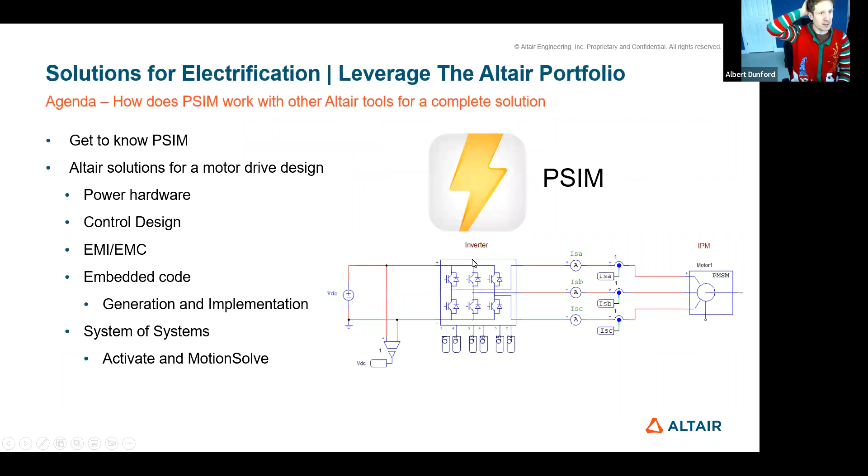It looks to me like there's a lot of automotive people in the session today, so this is right up their alley. Okay, so we'll slip by this one about PSIM. PSIM was first developed about 27 years ago. It was specifically developed for the simulation of power electronics, and you can see it positioned here between what we would call the system simulators, so Simulink, Activate, maybe ANSYS Twin Builder, and then the device level simulators like SPICE. So PSIM occupies this nice little zone in between the two of them.

You can do control level simulations with PSIM. You can do device level simulations with PSIM. Obviously, there's stuff that SPICE does well, which is the selection of circuit models and IC models, and clearly Simulink and Activate have functionality beyond what PSIM provides. I think of image processing toolboxes and things like that, which is just not power converter related. So why does PSIM exist? It's widely regarded for simulation speed, robustness of results, and dependable convergence.

Okay, the PSIM advantage. PSIM was originally developed in the 90s, because power converters and power electronics were becoming more prevalent and more commercially or industrially relevant as more switching devices were becoming available. The tools used at the time to simulate power converters were SPICE-based tools and things like Simulink, which were not specifically made for the simulation of power electronics.

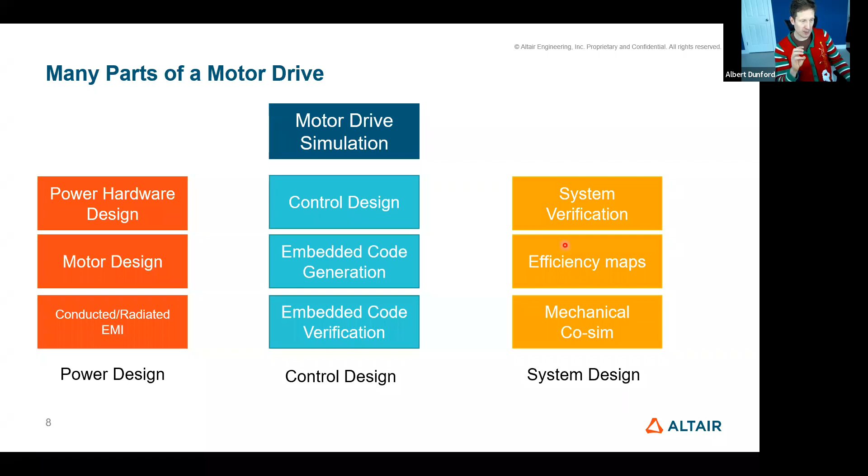Okay, so I want to spend a little bit of time talking about motor drives. We'll talk about power supplies a little bit later on, but based on some of the stuff that has recently gone on with development, linking to Flux and things of that nature, the motor drive part shows some really interesting things to discuss.

This slide is specific to motor drives right now, but a lot of what is here can also be moved over to regular power converters, be it a consumer grade converter or a grid-link PV application. The only thing that really would be crossed is the MotionSolve for the mechanical load or the Flux motor for the motor aspect. But this also gives you a look at where things are going with simulation, with PSIM as it integrates into the existing Altair tools, which are all mentioned here.

So focusing on a motor drive, I'll show you some interesting things with MotionSolve in a second. So this is a multibody dynamics tool. So we can include a simulation of the motor drive combined with the multibody dynamics. Flux and Flux motor are tools from Altair for FEA of motors for low frequency electromagnetics. We're going to see what can be learned when we include a Flux or Flux motor model into a motor drive simulation.

And then FEKO is a high frequency electromagnetics tool. The fun thing about PSIM is that because we've been set up to deal with derivative robustness in the power converters, we also are able to deal with high frequency interactions in distributed cable models that can typically cause issues, especially if you use a state-space matrix approach, which can lead to stiff matrix equations.

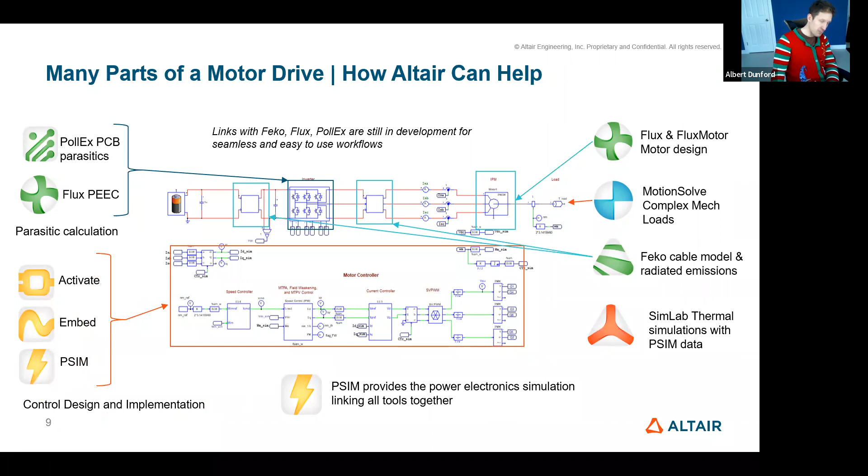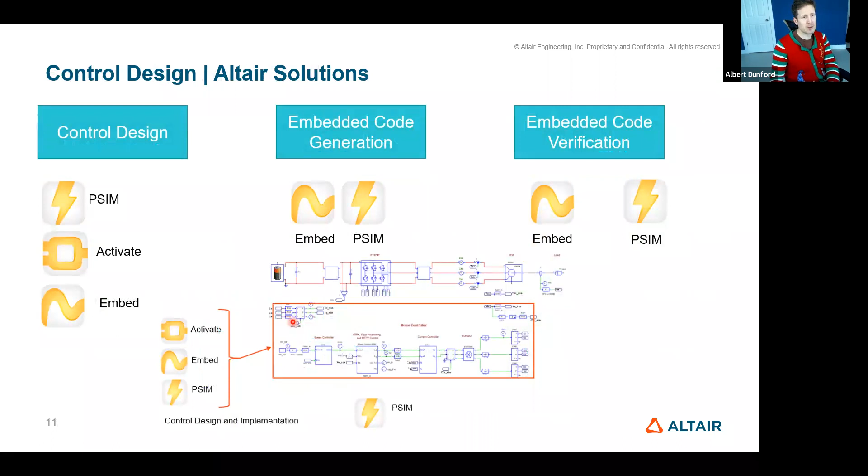There's the control side as well: Activate, Embed, and PSIM all can do control simulations. PSIM and Embed both have code generation workflows, and there's some things there to talk about too. Moving along here. Okay, so power hardware. These are all the things that deal with power hardware. I don't want to spend too much time on these. These are all kind of control design related tools. And then here's some system level simulation tools.

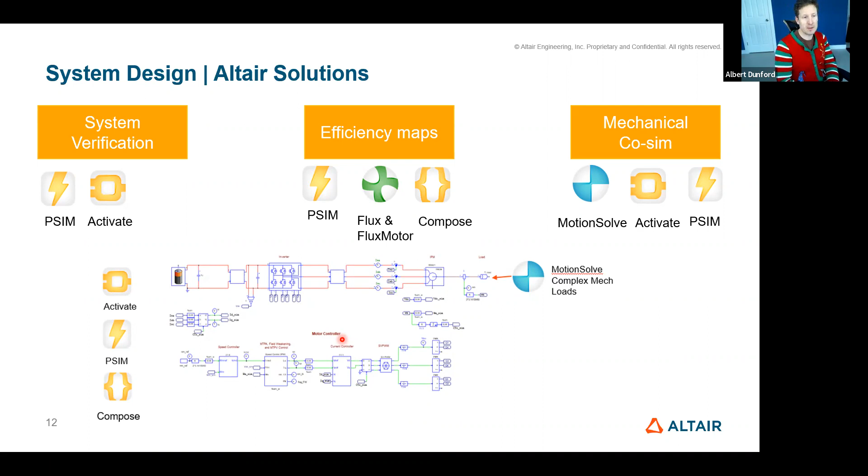So again, as PSIM matures inside of the Altair world, you'll see more and more links with other tools. Other tools to come will be things like HyperStudy, AI-based tools to help direct simulations to learn things in an automated way, with greater scripting and all that kind of fun stuff. So there's lots of other things to come. These are the things that we've been dealing with just recently. So a main strength of PSIM is simulation complexity.

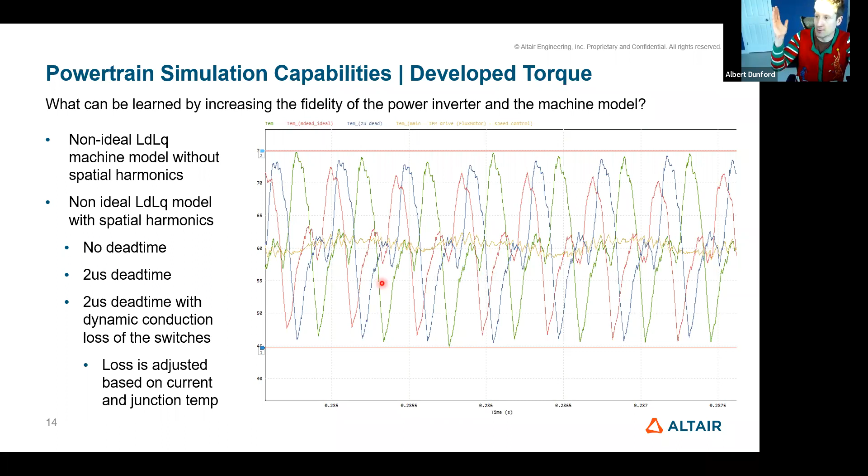And so here's another really fun simulation. This deals with motion multibody dynamics. So in this particular simulation, we have a motorcycle. And the drive for this motorcycle is a PSIM motor drive simulation, okay? And what we can look at here is, it's one thing to run a motor drive with a constant torque load. It's another thing, and I just want to get through a couple slides and we'll pull up some simulations to kind of look at this in a bit more detail.

It's one thing to do a motor drive simulation where we have ideal motor with no spatial harmonics and no LdLq changes. When we add spatial harmonics and we add a changing LdLq, that changes the control response of the motor. It makes the controllers work harder, introduces more noise into it. So what we can see here is that we originally had an aggressive motor control, which was stable with an ideal machine, and even was stable in a constant acceleration use case.

But what we can do here is we can see what happens when we add in now a multi-body dynamics of the system. So what we're seeing as this kind of plays over and over again is the top one is we've tuned the motor. So the bottom one was the original, which was an aggressive control loops for ID and IQ. And we can see,

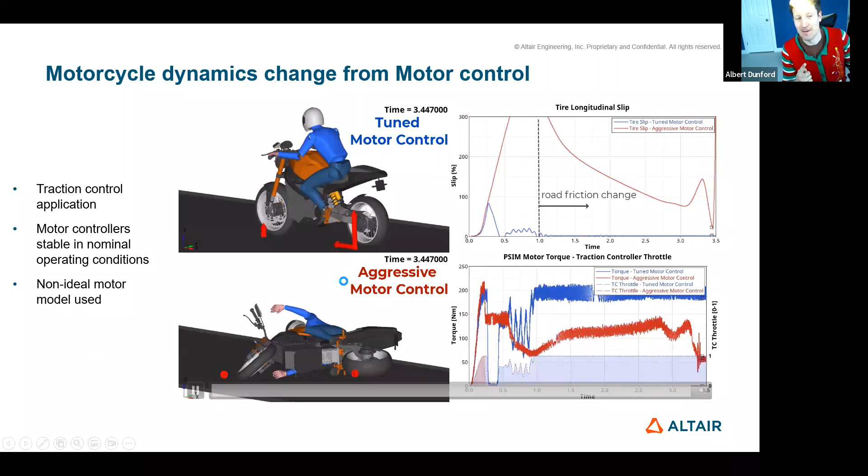Oh geez. Drew, it's just my PowerPoint that's frozen, right? I haven't frozen, just to be sure. Okay, no problem. Am I frozen or is it just the PowerPoint? It's just the PowerPoint. Okay. Close. I'll replay that video. Thank you, Microsoft PowerPoint, for your contribution today. We'll come back to that.

We were here. Okay, so you can see here, the bottom, this is developed torque, and this is the throttle command down here, and this is the tire slip of the two systems. So the red one is the aggressive controller, which was looking okay during acceleration, but then what happened is that the friction coefficient changes and caused the traction control to kick in.

And so you can see with the less aggressive motor control algorithm, this is for the current loops, for ID and IQ, it was able to handle the changing traction requirements. And you can see how that changed with the tire slip. And as we see here, the top one was able to maintain traction and still recover, where the bottom one went out of whack and caused our dear little friend to crash.

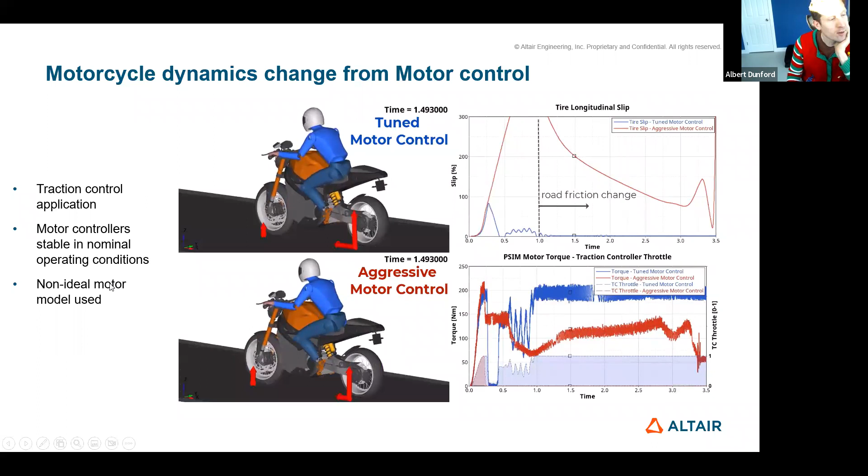So this is a full motion multibody dynamic simulation that we did using that. And again, it looked okay with an ideal motor model, but when we went to the non-ideal model, it really started to show issues. So here's a little look at that. So we did an ideal machine, and then we did the same controller with the non-ideal Flux co-sim, which had the spatial harmonics and the non-ideal LD LQ, and we can see the instability in the control response, right?

It still got up to steady state speed and it still recovered, but we can see that there's oscillation there in the ID and IQ values, which was causing oscillations in LD and causing oscillations in the developed torque. So it was marginally stable, but it still got up to set point speed. And we can see that none of that drama was present in the ideal motor model.

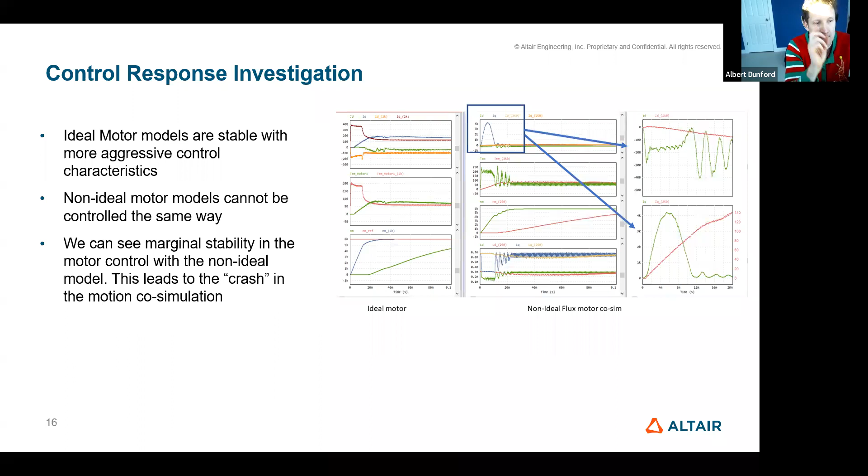So in this case, there's two control scenarios. We're switching at 20 kilohertz. Then the inner current loop had a 2 kilohertz bandwidth and then a 200 hertz bandwidth. So we did a 10x reduction there. And we did the ideal and the non-ideal. And you can see right away that the non-ideal motor model really behaved a lot differently with that more aggressive controller.

And here's another slide looking at how we can use these co-simulations to look a little bit more here. This is again with the motor model from Flux, which gives us copper, core, eddy, and hysteresis losses. We also are using a thermal model here where we can change between space vector PWM and DPWM and look at how the losses change on the device itself.

So we can see the developed torque is roughly comparable. On average, it is the same. Our total losses from the inverter were reduced by about 300 watts, and that's mostly in the switching losses. Then we see the copper losses, the core losses, and eddy losses are different. So copper loss reduced by about 90 watts, and the hysteresis losses went up by about 10 watts with DPWM. So DPWM saved us about 380 watts at this operating point. And we've modeled loss, conduction loss, and dead time with IGBTs here.

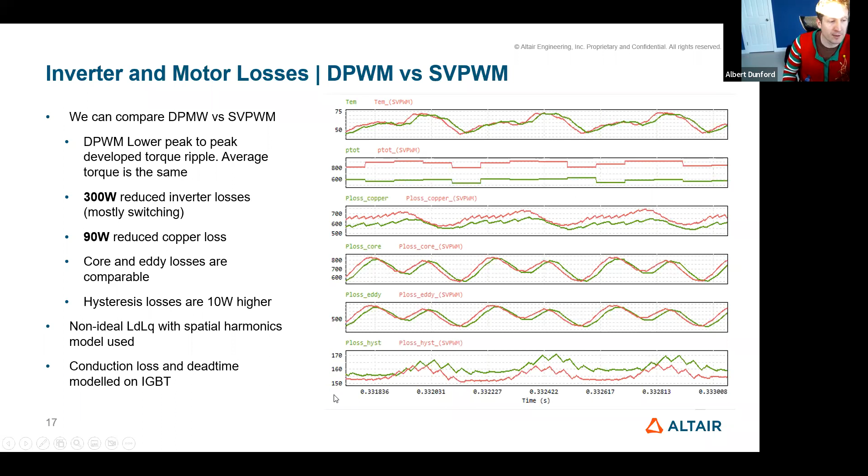So what's my next slide? Yeah, so let's scoot out of here and let's look at a couple simulations. Are there any questions while I'm heading over to simulations? Okay, perfect.

If you're not familiar with our design suite, this is it. So this is the motor control design suite, and what it allows us to do is to have a motor drive simulation and then tune it to our operating scenario. So DC bus voltage, switching speed, a constant torque load here, some basic motor parameters, and the motor control parameters here too.

So we can basically click update parameter file, and it gives us some controllers. It gives us a speed torque curve. So this is our operating envelope, what's possible based on our DC bus voltage.

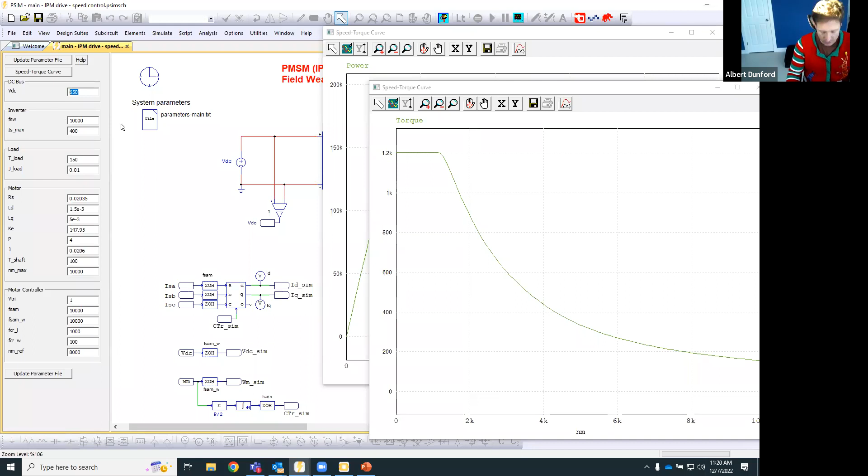So if I come in here and say this was a battery pack and we were at low state of charge, so say 400 volts, we can generate a new speed torque curve. There's the power curve, torque curve. So there's the new torque curve versus the old torque curve. And we can see, say, 8,000 RPM, 200 Newton meters versus now 150. At 4,000, we're just above 200, whereas here we were above 400 Newton meters.

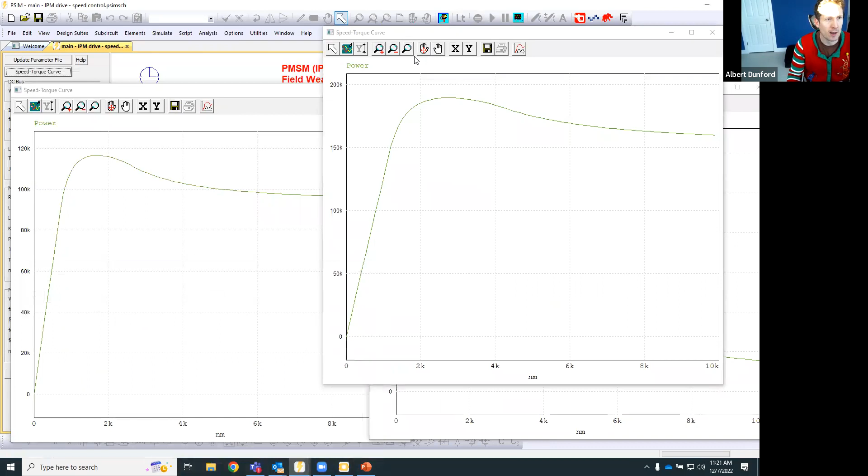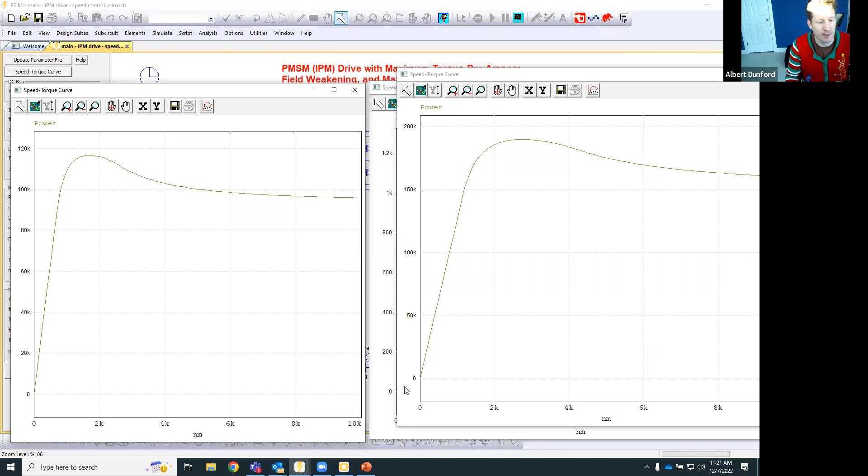And then the max torque region is about halved as well. You can really see it in the power profiles. So these are peaking out around 120 kilowatts versus 200 kilowatts, and 150 versus just under 100 kilowatts steady state. So these are some interesting. So this is one thing you can do with it.

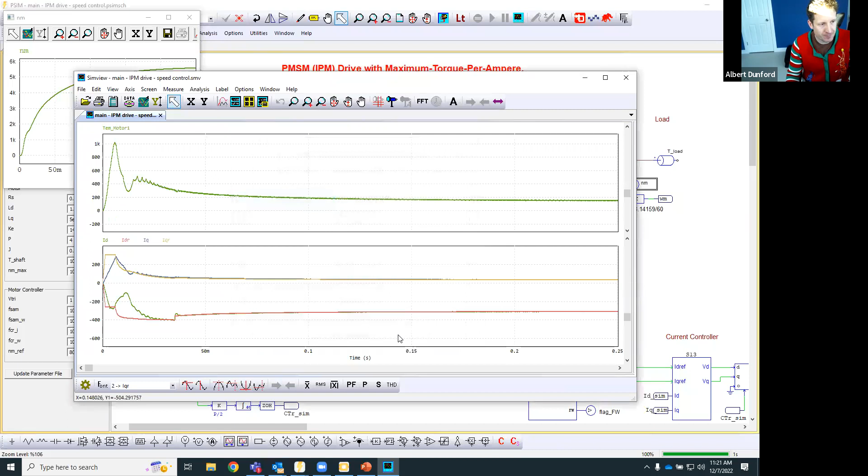And the other thing you can do with it, again, you can generate these control loops. So this was with an ideal model. And again, we can run the simulation and we can see the shaft speed. We can see the developed torque. Here's the developed torque of the machine. And again, it's the control values here, ID and IQ. So we can see what this looks like. So this all looks pretty good.

And one of the things you could do would be then to take this away and then link this to MotionSolve to do that multi-body dynamics that we looked at a bit earlier, right? So what has happened is we've now got the ability to do the Flux Motor lookup. We've also got the ability to do the Flux itself lookup.

So Altair has two tools. There's a tool called Flux Motor, which is basically for designing more common motors in more of a template kind of way, versus Flux, which is a full 2D or 3D solve of your motor itself. And so how we're doing this right now is it's based on lookup tables. So the lookup tables are generated by Flux, and they include a lot of information.

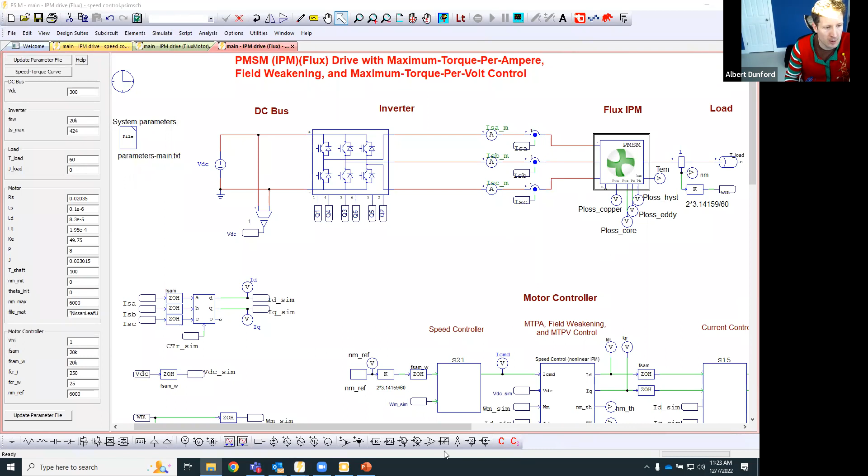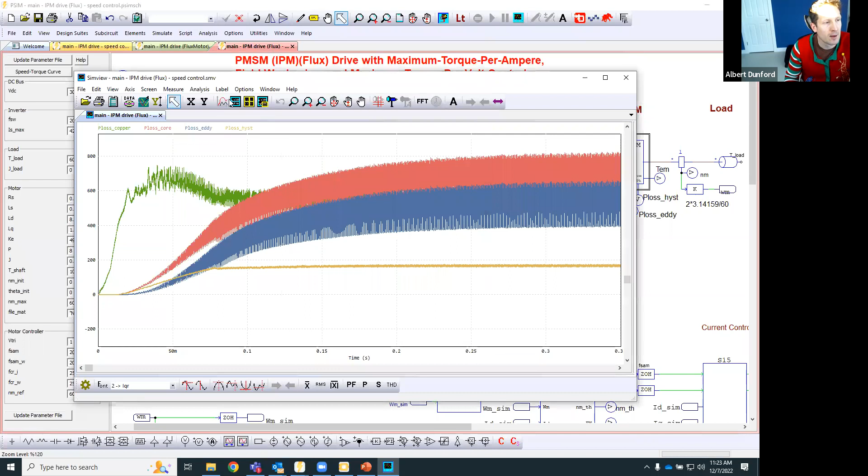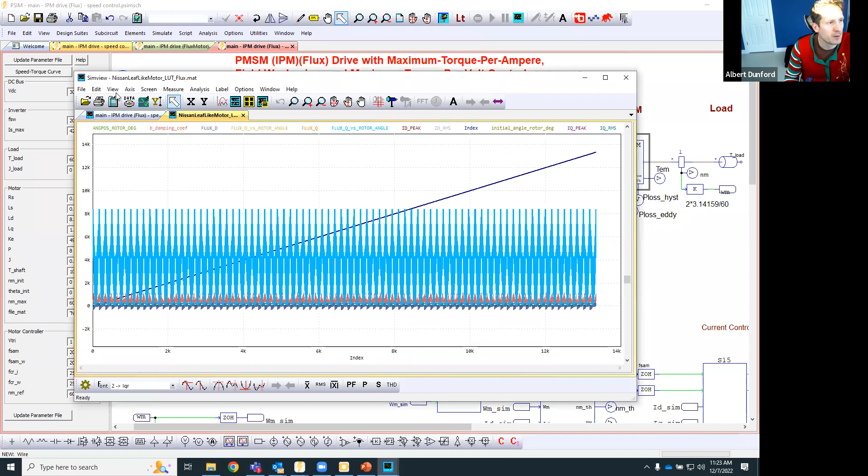So we can pull up what the information looks like here. Okay, so these are some losses. Let me pull up Flux. Here's the lookup table. Let me show you the data set that's being used here. Okay, so we've got rotor position, we've got D and Q flux, we've got iron losses, we've got a core, we've got hysteresis, all that kind of information there.

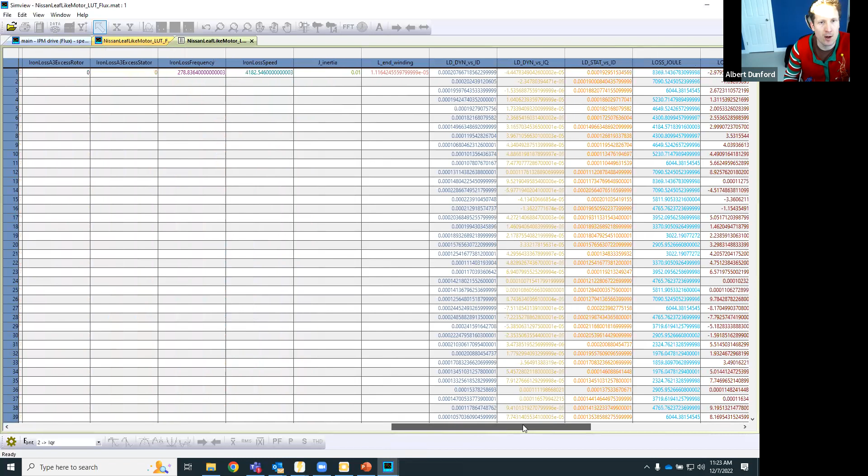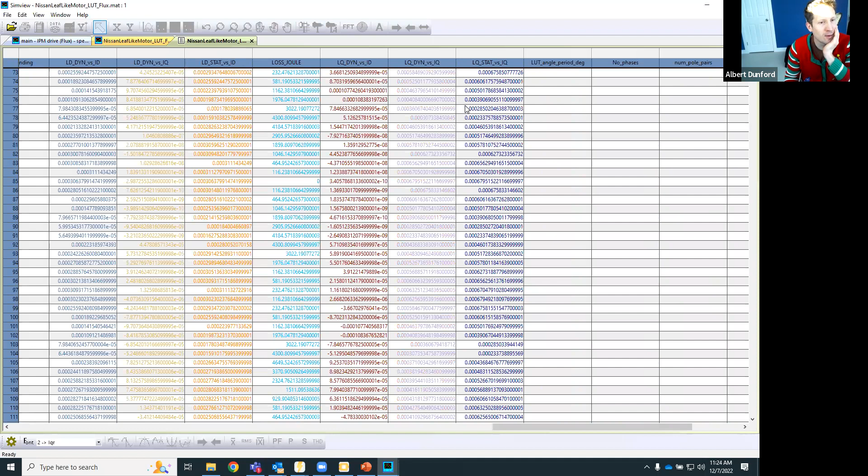LD and LQ as dynamic and static lookup tables. So it's really a fairly comprehensive listing of lookup values and information here. So this is the motor model, and again, it's a lookup table. But from there, we can look at this kind of information. So here's the losses from that machine. Here's what LD and LQ look like. The developed torque.

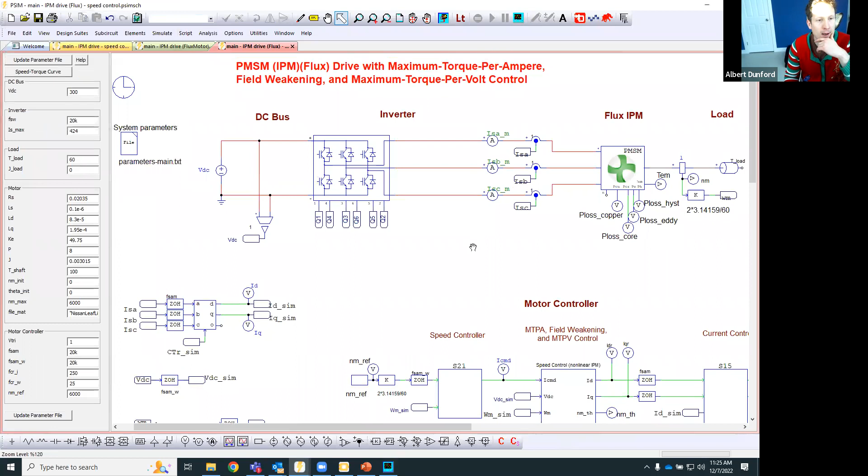Is there, and we're able to zoom in and see just what exactly is going on. So here's what the LD and LQ values are. Here's the developed torque of the machine. And again, this is an ideal switch. So going from here is relatively straightforward. We can come in here, we can switch this to a thermal model. So this models our switching and conduction losses and gives us a first pass at our heatsink. We can also change up the DC bus, put in caps, all that kind of fun stuff.

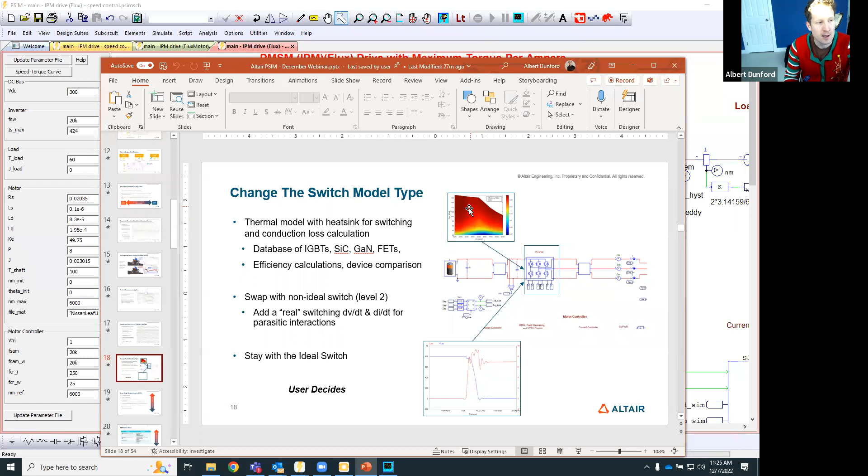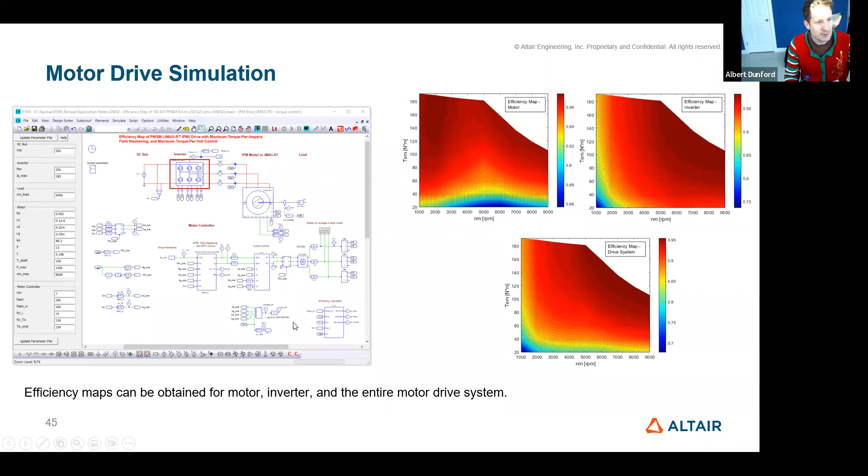And you can generate these plots for different junction temperatures and, if you're running off a battery, different battery states of charge. So you can do a nice drive cycle evaluation or that sort of thing. So these are some nice things that can work from there. So again, that's going to be released next week. So coming away from the Flux models, we'll come back to some simulations. I just want to make sure I get through content here.

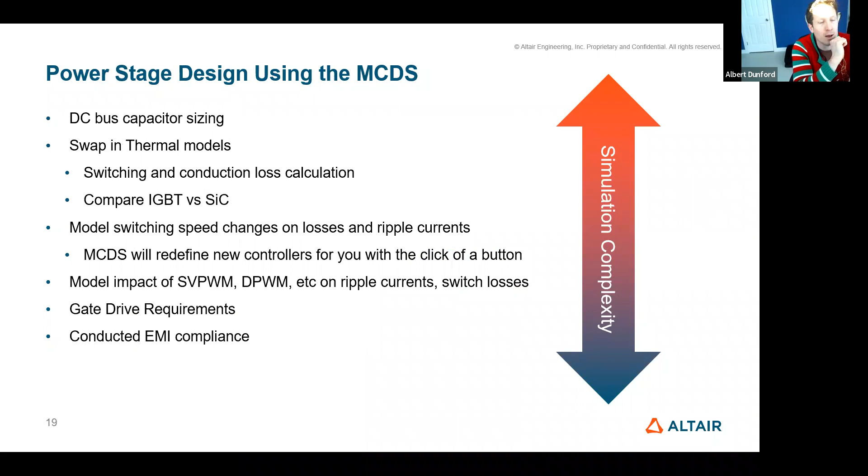Again, it comes back to your decision about what kind of model you're going to use, be it an ideal switch or the ideal machines or whichever you're going to use. And so it's really about simulation complexity being your choice. So this kind of covers the ideal switch, the thermal switch. So we've looked at the ideal switch. I haven't shown you a simulation yet with a thermal switch. We'll look at what the level 1 and level 2 switches can show us in a moment here.

That bridges me to conducted EMI. What we're trying to do on the EMI front is show what can be learned in simulation versus discovery in chamber. We're not going to ever claim to be able to replicate 100% what the hardware will tell you.

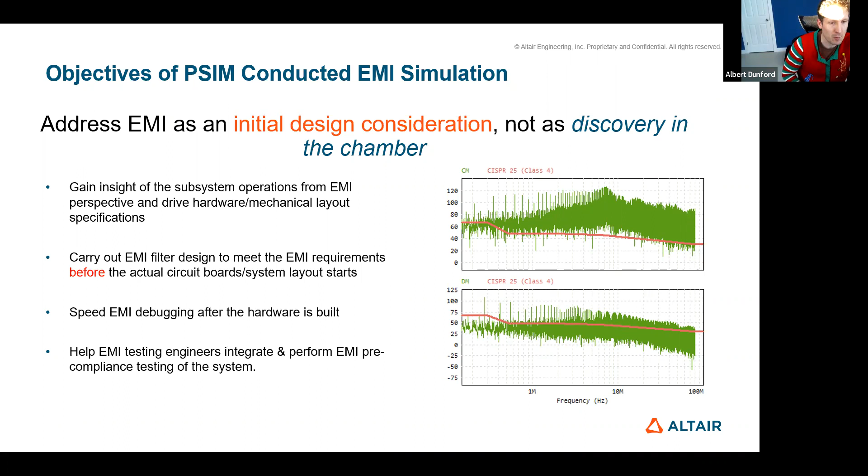What we do want to be able to do is to give you actionable design decisions, so you can learn these things in simulation before you either pay for testing or build prototypes, or you can look at sensitivity to certain things. So it's these things that we want you to be able to understand. So again, looking at how we can best mitigate our EMI issues, or filtering and things of that nature.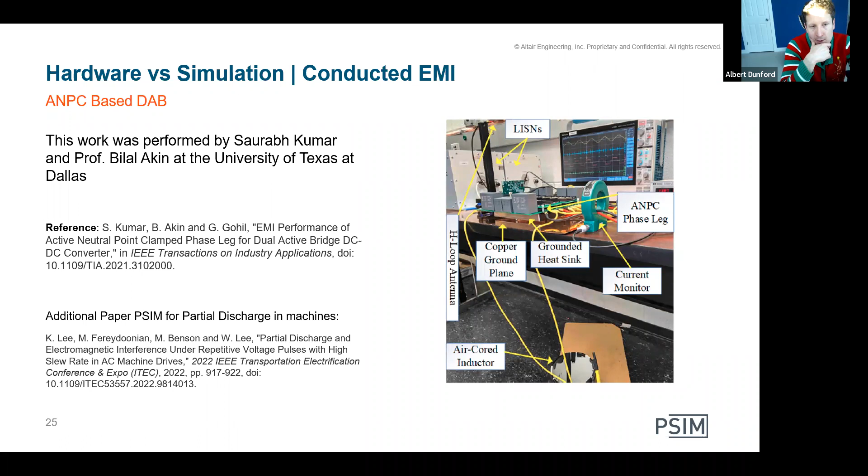Okay, so there was some work done at UT Dallas. They looked at a dual active bridge converter to look at conducted EMI, and we're going to be looking at the common mode current here. So this is the setup: basically the dual active bridge with silicon carbide devices on the primary and secondary. These were the parasitics associated with it.

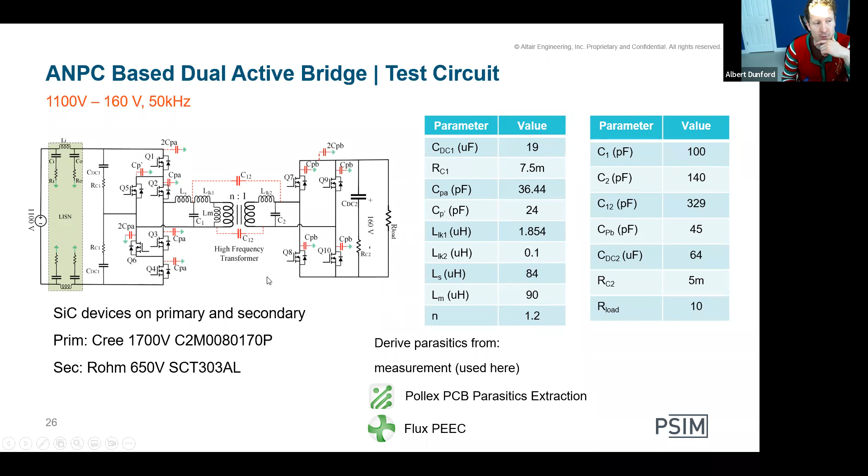You can measure those, or you can derive them with hand calculations. Some people do that by hand calculation, or you will be able to use, in Q1 next year, Flux PEEC or Pollex PCB to come up with what these parasitic values are. And then this leads you to be able to do these sorts of simulations. So I'm not going to say that we're going to replicate hardware 100%. What we're trying to do here is provide you with actionable design decisions.

Here are some comparisons of hardware versus PSIM. The transformer was originally not modeled very well, so this spike here comes back to an issue in the transformer model. So again, we do need to have an understanding of what we're dealing with and be able to interpret results properly. This is a fairly complex subject.

So this is really, I think, the fun slide to talk about when it comes to using PSIM to do these sorts of things. If you're not aware, and I'll show you an example right away, PSIM has the ability to run a simulation and then save that state, and then use that state as the starting point for another simulation. So in this case, we could run a base simulation that takes 100 milliseconds to get to steady state, and then maybe we only need 20 milliseconds to do our analysis of the EMI.

So we could run this first simulation with a fairly coarse time step, and then the subsequent simulations with a fairly small time step. If you were to run one simulation by itself, maybe the base simulation would take half an hour, and the last 20 milliseconds would take 10 minutes. So you'd end up with like a 40-minute simulation. If you were to do all four of them by themselves, it would be 160 minutes worth of simulation.

But with PSIM, we'll do the first simulation, and then all four of these simulations we can script and run in parallel, so that we're running on open cores or open threads on our processor. That allows us to run these four scenarios in not necessarily the time of one simulation. So if it was going to be 30 minutes here and 10 minutes for one, it would maybe be 30 minutes here and then 15 minutes for four.

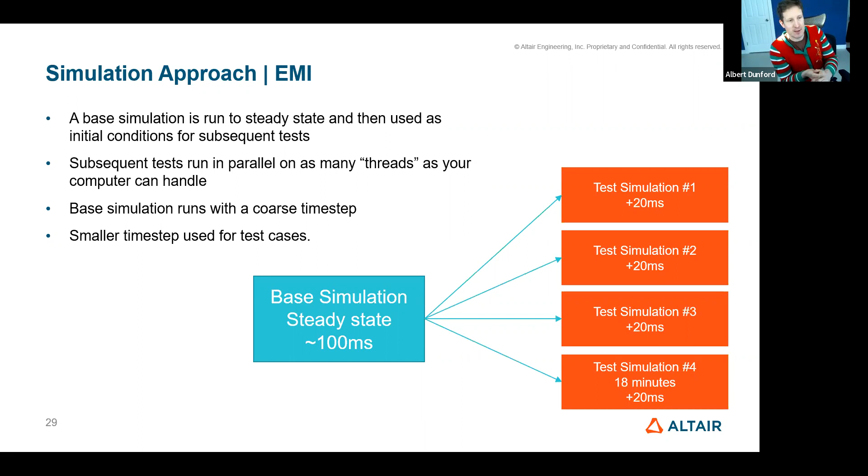So we're able to do this branching and testing, which really allows us to discover sensitivity of these things in a very nice way. This is, I think, a very powerful workflow. And let me just show you what we're talking about here.

So yeah, I'll use this simulation as the start. So what I can do is I can come in here and put it back to nominal, 650 volts, update parameter file. So what I'm going to do is I'm going to set the save flag. And I'm doing this manually just so you can see how it works, but this is how things would run if you were to do this in script. So you can write a script that'll automate all of this.

And so we're going to run it and we're going to get to 250 milliseconds and we're going to have that save flag set. So we're going to run this. This should be a fairly quick simulation. Excellent. And we got to our endpoint here, 200 milliseconds. Is it 200 milliseconds? Yeah, 250. Where's the last 50 milliseconds? Print step, total time. Where's the last little bit?

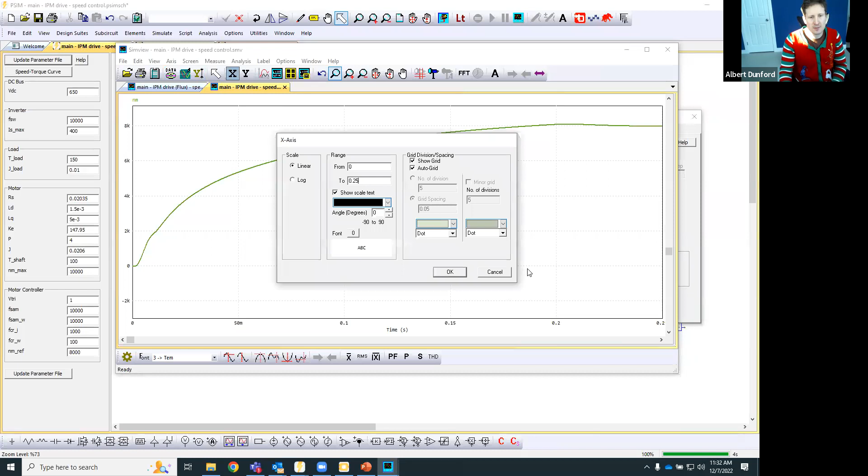Oh, okay. Anyways, so then what we'll do is we'll now toggle this to be 0. And I'll do the load flag now at 1. So I'm going to use that endpoint as the starting point for the next one. And we'll run another, say, 350 milliseconds. And let's change the reference here to be minus nm_ref. And then we will rerun. Hopefully that changed signs. Excellent.

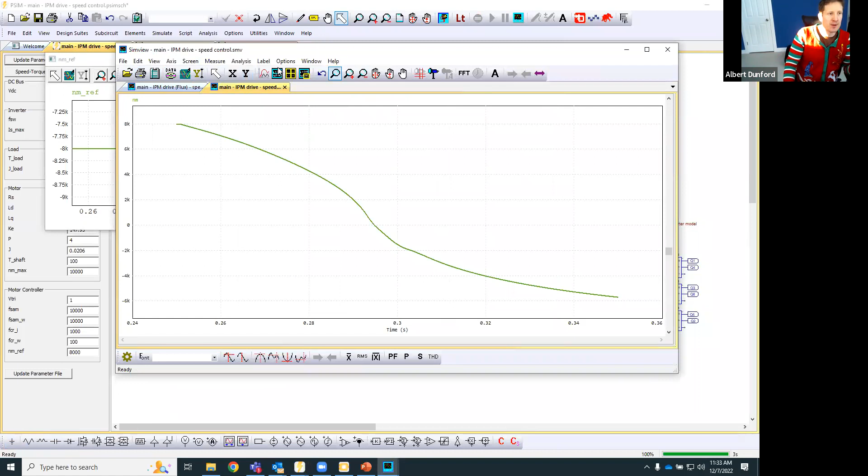So there's the next bit. So we were at 8,000 RPM. I changed the sign of the speed reference, and we ran the next chunk of simulation. And I could also then use that same starting point, and I could have a different time step. It's 10 microseconds. Let's go to 5 microseconds. So I can change the time step. I can rerun. So I can do this sort of simulation, and you can automate this process.

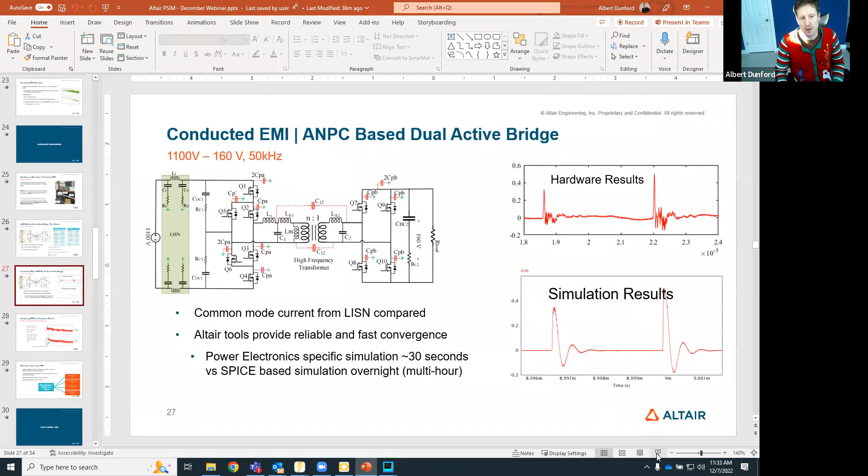You can run it so that we have, again, the test scenarios coming from the script. You could have a spreadsheet of different test scenarios and run through each one. And so really, I think the power here, the strength of simulation, is that we're not going to be able to replicate the hardware results really well. But what's the point of matching maybe one set of hardware,

because there's variability in the hardware. So if we can analyze our sensitivity to different common mode capacitance values, maybe our sensitivity to the gate drive resistor, which impacts our dV/dt, di/dt, we can really push through a lot of simulations and really understand a lot more about our converter doing these sorts of simulations with the multi-threading and the scripting.

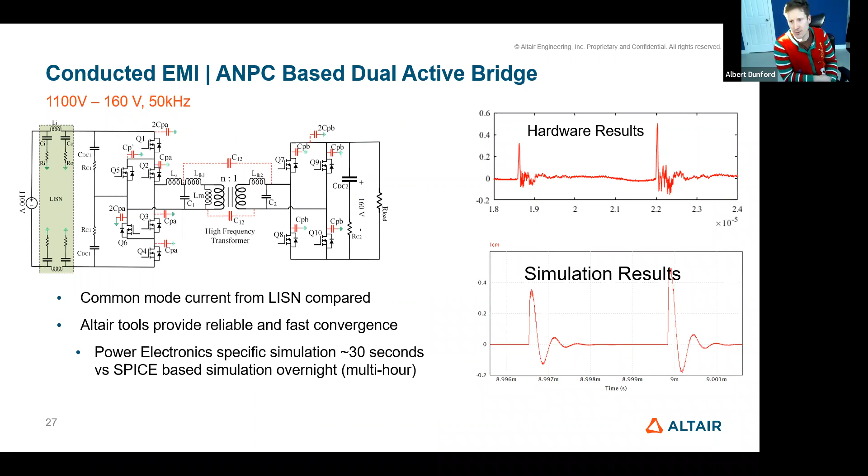And why does that matter? Can I show an example? Yeah, I'll try and show an example later. The question is, can you show an example of using the EMI simulation using scripts? I will try to a bit later, but the EMI simulations take a little bit of time to run. The typical steady state values are in a few minutes, and I'm cognizant of time here. We'll see where we get to towards the end if I can pull one up.

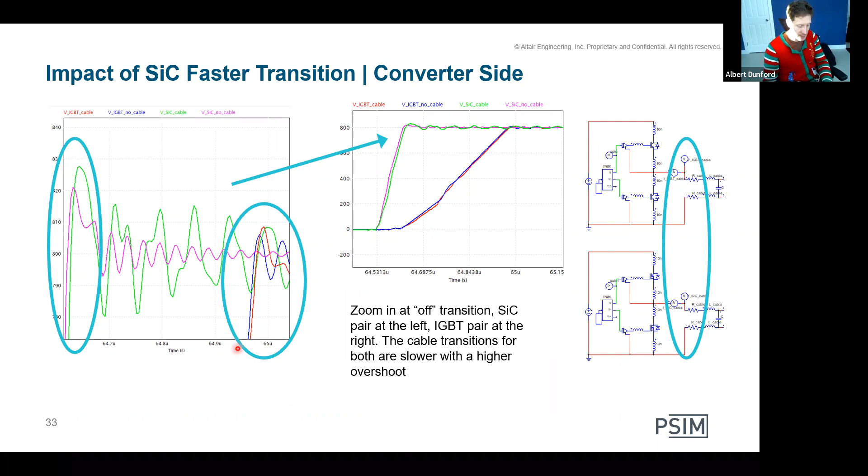So here's the switch side when we do the simulation. We can see the over voltage, the higher ringing with a silicon carbide device, again, interacting with common mode capacitances, interacting with parasitic inductance. All these things are leading to a higher ring with the green and pink here versus the red and blue, which is the IGBT. The real fun is at the load side, where we see a much greater interaction and ringing with the cable. And so this could be a real issue.

So if we come back to this simulation here, if this was our real power converter with this cable here, what have we done? Our original goal was to reduce the loss here, so P loss on the switches. Why is that drawing like that? I won't try and draw. Clear, erase all ink. So we were trying to reduce the losses on the switches. And so that has happened.

But what has happened as a result is maybe we have to put a choke over here now, or maybe we need a more aggressive EMI filter over here. So really what you're doing is shifting losses away from the switches and putting it into passive elements to mitigate the EMI or other issues that you might be dealing with.

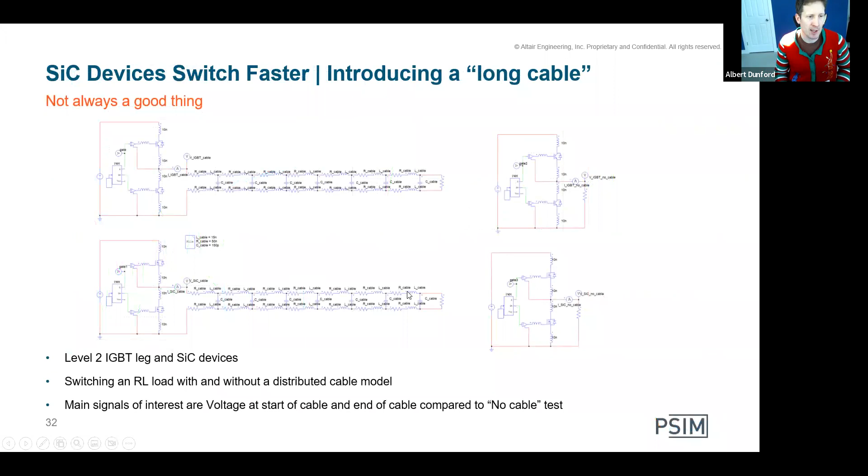So then we get to here. What we have then is the ability to record or measure the current in each of the conductors in each of the sections of the cable. And then we can bring it out to Feko, and we can do a cable radiation profile from it. Now, this is just a proof of concept set of images, where we took a cable and overlaid a piece of information onto it. There's not that many frequencies, and they're all clumped over here because we were just looking to see what we could do.

And we're able to look at antenna pickup. So this is E field and H field here. And we can see the surface current, so this is the sort of thing that we can do with Feko. And this is the beginnings of being able to appreciate what the radiated emissions might be like from cables, either say battery to our inverter, or a cable between our inverter and our motor. So we can include this sort of thing here.

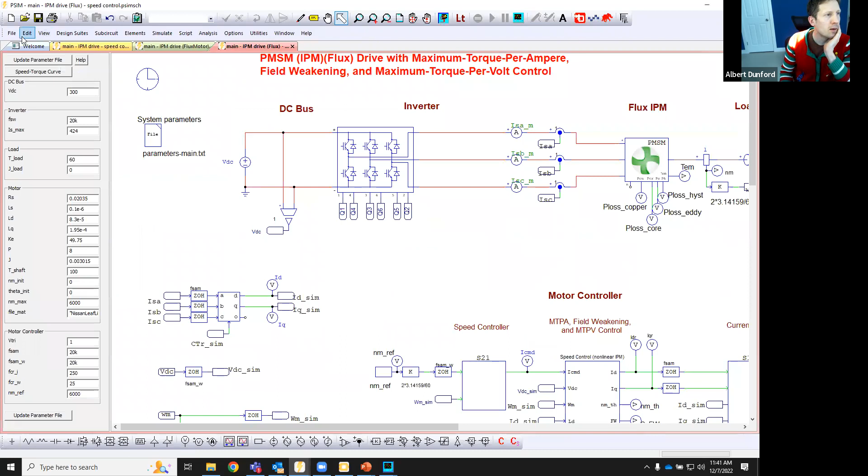Yeah, so this is, again, linking Feko and PSIM. Let me show you what that cable looks like. Oh, wrong one. No, sorry. Feko. No, okay. I thought it was this one, but it's not. It should be here. There it is.

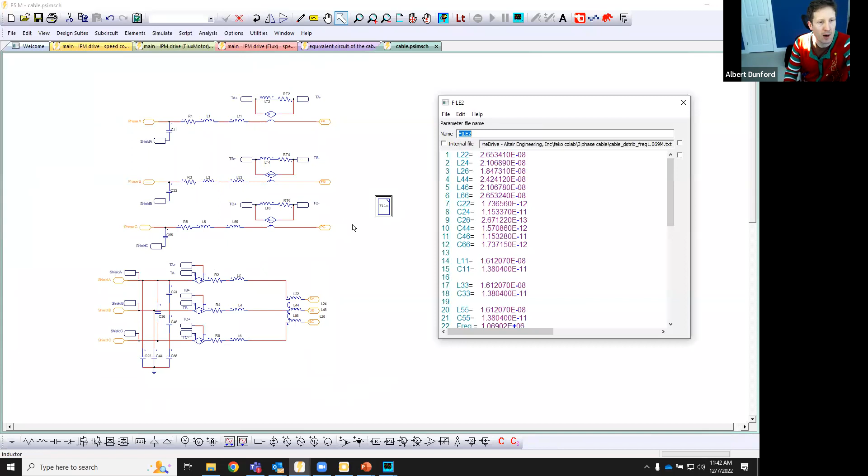Okay, so here's that cable model itself. This one was individual conductors with a shield. So these are the conductors, and then this is the coupling to the shield. So here's the shields, and the only coupling between the conductors is through the shield here. And these are the kinds of values we're dealing with for the R's and L's, so very, very small values.

And then we build this up to look at the cable test, where we're grounding the shield and we've got the phases set up. So this was a basic simulation to test what was going on. This is a really fun simulation to work with. Let's do a basic thing here. Let me disable this. So this has only got one voltage going, and we can look at the induced voltage on the other phases. Oh, it's finished.

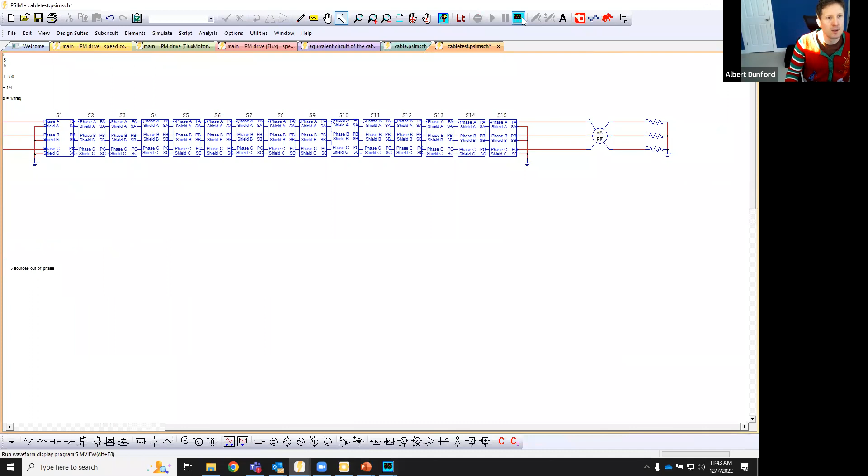So there's the load currents. Here's making sure that everything was wired in: 2, 3, 1, 2, 3. Oh, and just to load it up. Sources, source ABC. Oh, it didn't have anything.

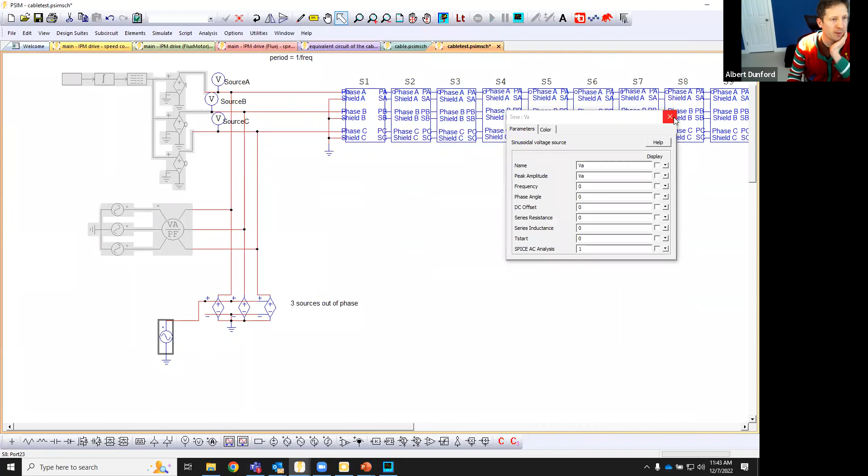Okay, I'm not gonna see. I played with it last time I did it. I'm not gonna try and understand what I did wrong. But this is basically the gist of it. Each one of these is this cable, and we link it together, and then we can drop it into a simulation and run it from there. Okay, back to the slides.

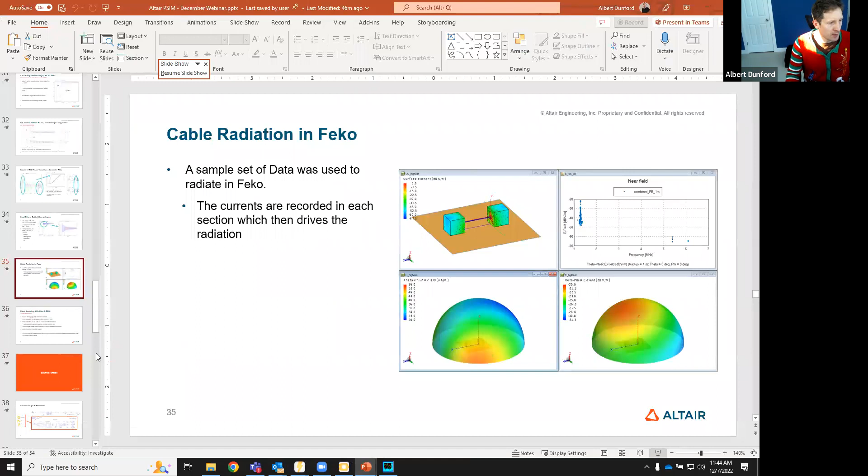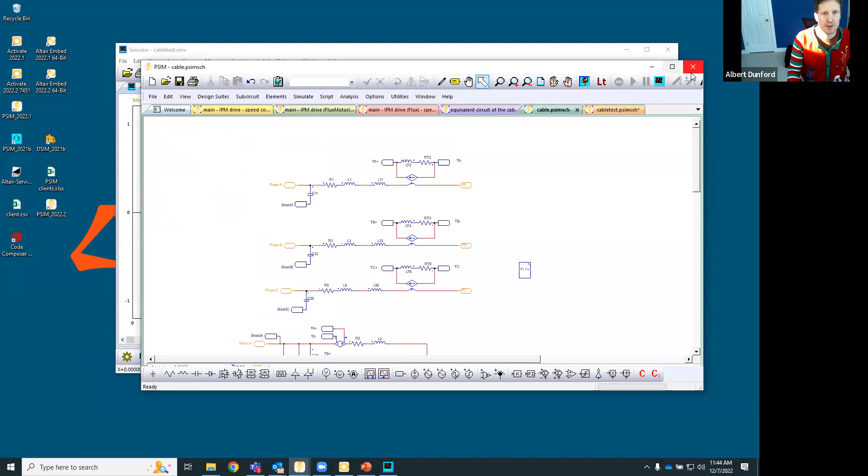Okay, so some other things to talk about here. That's kind of a lot of the new stuff that I wanted to talk about. Now I'd like to talk a little bit about power supply simulation with PSIM, and then I'm hoping to get into some embedded code generation as well. So let's come back to here, minimize this. So let me just close everything down. Okay, starting fresh.

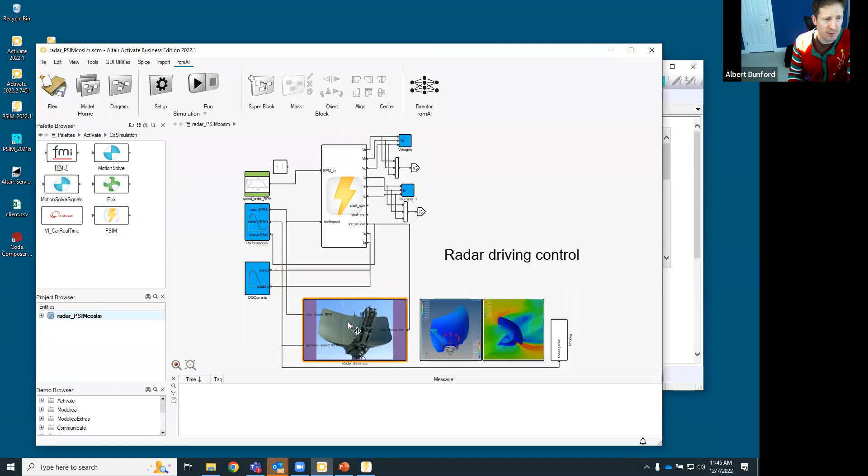So while it's loading, I would also like to highlight the existing workflow with Activate. So this is one of the ways that you can link to MotionSolve. Basically a block has been added to Activate in the co-simulation library here with PSIM. And then this will link you out to, in this case, the radar dynamics model, where you can link between Modelica or MotionSolve blocks. This is the exact same workflow as the Simulink co-simulation. So we do still co-simulate with Simulink.

That's not going anywhere. So you will be able to run a PSIM simulation of the power stage with Simulink driving the controls. And you will be able to use the Flux co-simulation there as well. So you will be able to drop that Flux model into your Simulink simulation, or if you have your controls in Activate or Simulink, you will be able to have that detail of the power stage in PSIM. Okay, so this is the same workflow.

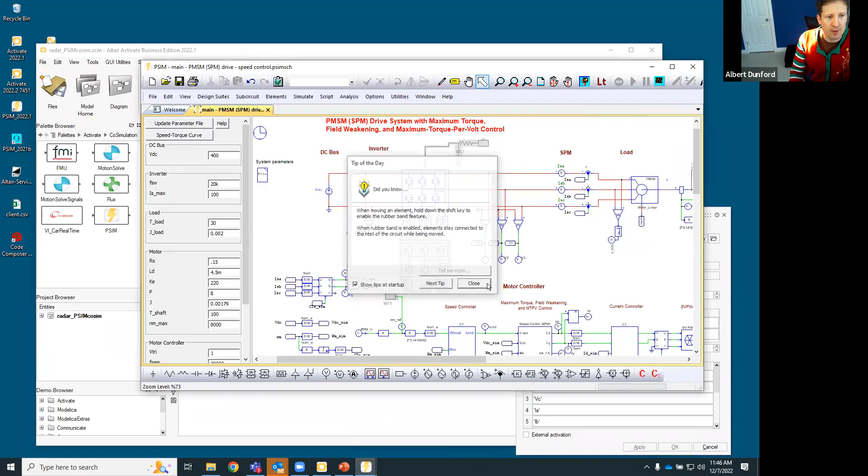Basically, you drop the block in, and on the PSIM side, you can see the various labels that we have here connecting. So there's the inputs and outputs. So here's, say, the feedbacks, or the outputs of the voltages are there, and the currents are here as well. The RPM input is coming in. So we just put these little input and output nodes, which link us back out to the top level simulation.

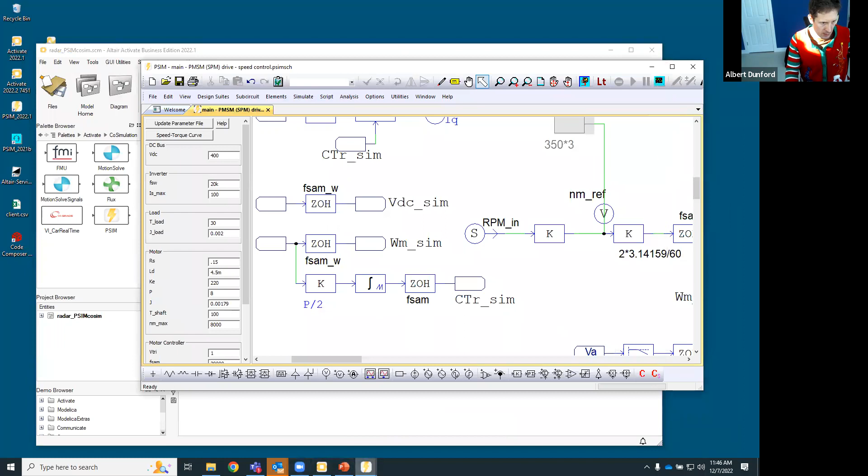Okay, so close this. So that's how things are working, and the co-simulation isn't going anywhere with Simulink, and it will just be further developed with Activate. But let's look at power supplies here for a moment. So you may or may not know about our resonant converter design suite.

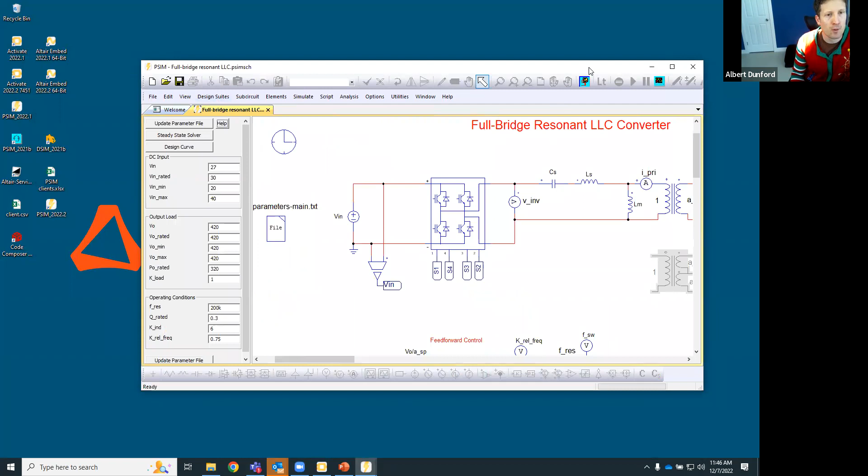This is a really powerful tool for coming up with the control characteristic for the resonant circuit here. So we have this nice design curve tool that allows you to plot and look at the various inductance ratios and quality factor ratios and how they come back and play with the gain. So this is calculating now with a closed form solution, a range of, let me close this.

So we see a range here, and this starting point of the gain is the zero voltage switching beginning frequency normalized to 1 at resonance here. And we see the inductance ratio versus, so this is a different quality factor with a different inductance ratio. We can see how that plays in. So the strength of PSIM is that we're able to do a frequency sweep of almost anything. So what do I mean by that?

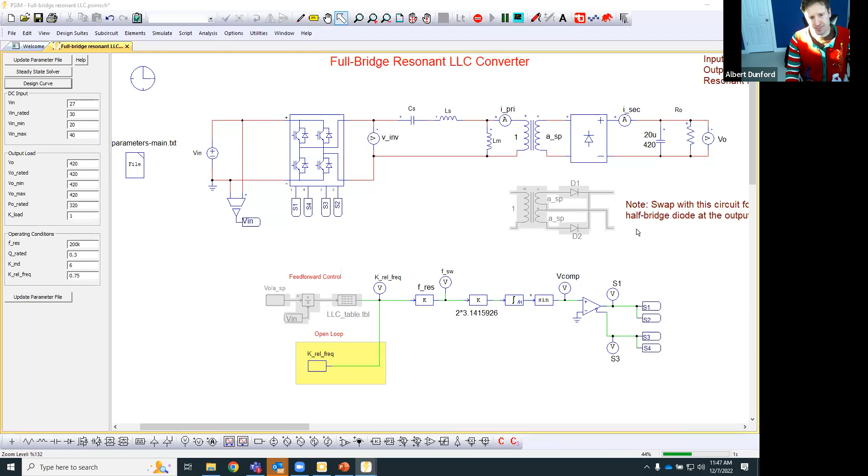Well, we can run this simulation, and we're able to look at what the output voltage is, VO. So there it is, there's the output voltage, 440 volts. And if we come over here, we're able to introduce a small perturbation into that frequency. So this is a relative frequency, K relative, I think is 0.75.

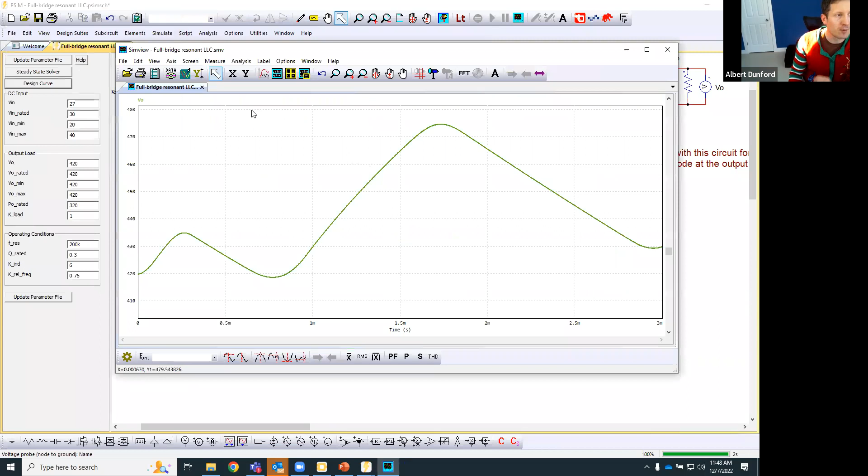So if I introduce a perturbation here, say 0.07, and we'll do it at, say, 500 hertz, wire that back in, we can see a perturbation in the, let's run for a little bit longer. Total time, let's do 10, and we'll do a little bit less on the perturbation. 5.

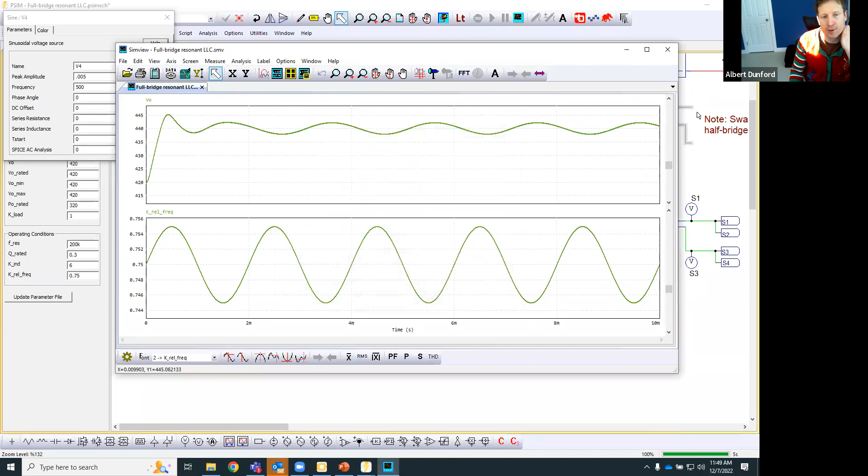There we go. And we'll pull up here, K relative. So this is our perturbation, and then this is our output voltage. Now this is a complex topology in terms of trying to figure out what the average model might be, so we can do a frequency sweep of this, and that allows us to do a control design of this quite quickly, either the analog or current.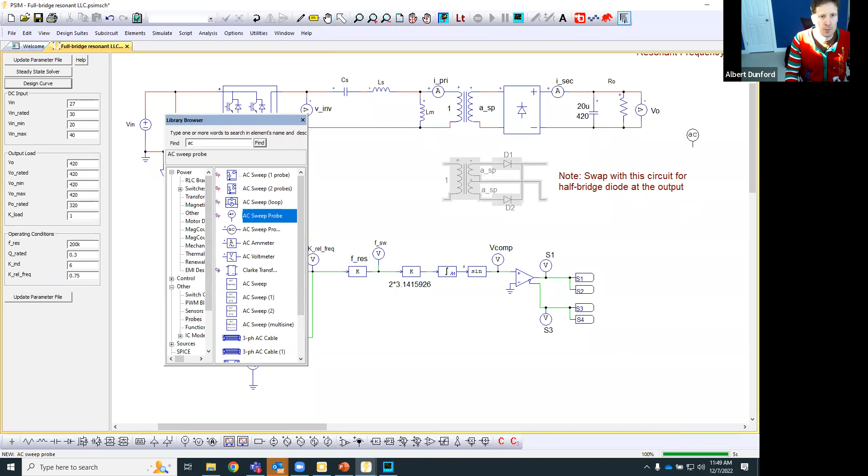So AC sweep elements: grab an AC sweep, find AC sweep probe, and then the AC sweep block itself. So basically how this works is we would use this to drive what our perturbation would be, and then we would measure the output voltage over here, and this would give us what the open loop transfer function looks like in a closed form method.

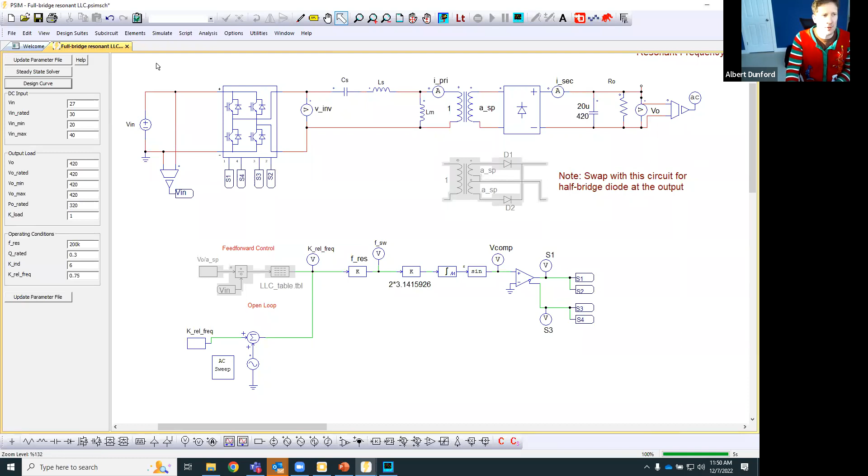And this is the basis of all of the frequency sweeps in PSIM, and this is a key aspect to control design. We don't care what this topology is. So in this case, this would be a resonant LLC. If you come in and look at some of our other examples, a complex topology to work with would be this phase shift full bridge, where there's zero voltage switching here.

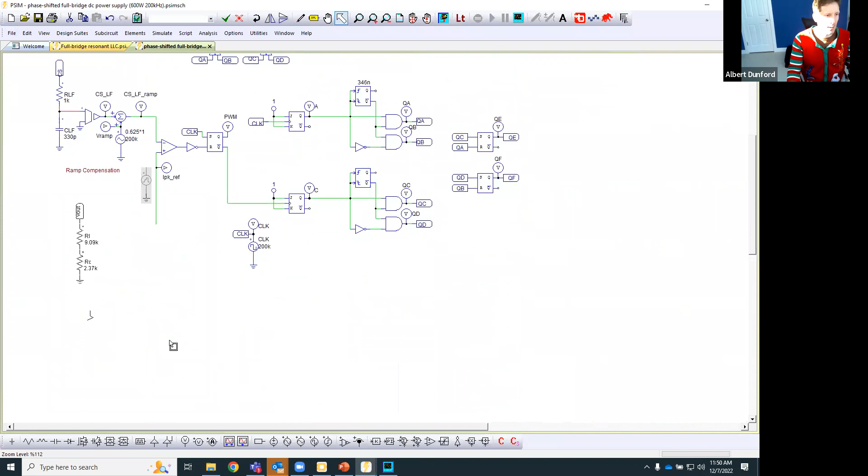There's an active secondary. We're doing peak current control, and we would be able to, again, use the same kind of concept where we have a reference, and we can connect this in. Wire, and then let's drop in a perturbation again. We'll go at a kilohertz this time, and this is at 1.8, so 0.18.

And again, we're able to look at that perturbation and VO. So there's that perturbation forming, not quite at steady state, versus the peak reference there. So this is the sort of thing. And again, we do those frequency sweeps where we can introduce that, and then we get our open loop transfer functions, and we can do control design from there.

I wanted to touch briefly on the power supply stuff. I did overload this with a lot of motor drive stuff because that was some of the really interesting things that were coming in the next release.

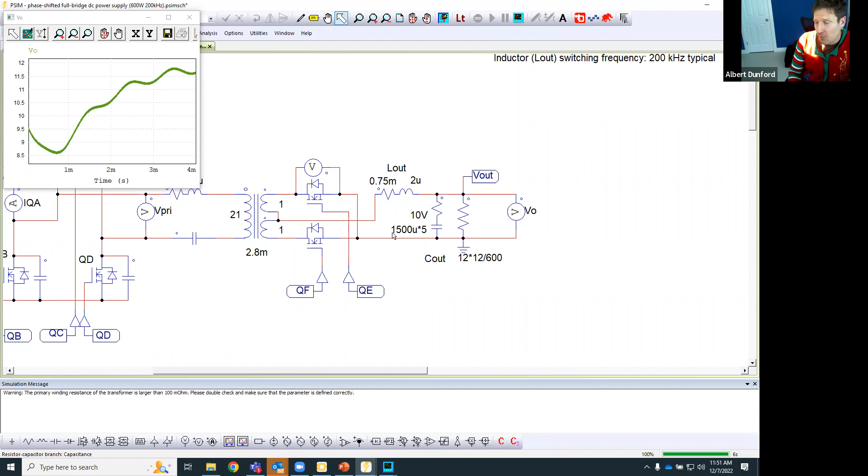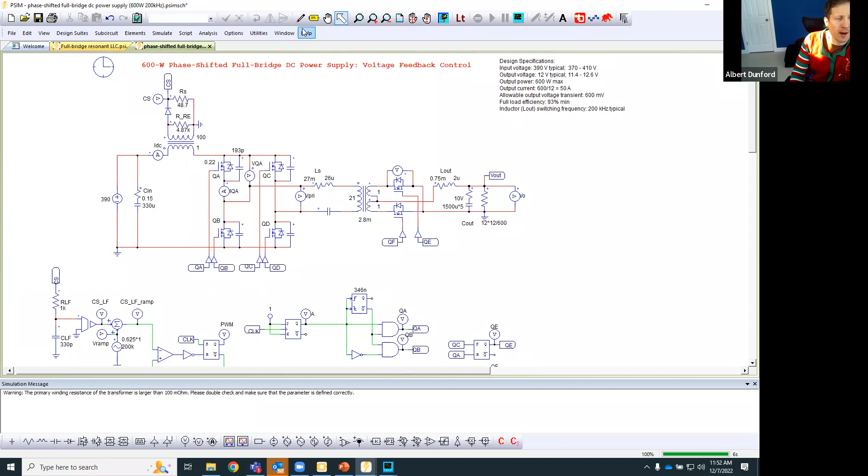So let's talk a little bit about resources for you. If we come back over here, AC Sweep, if we click into help, in some of these there's going to be links to existing examples. There will be links to tutorial videos as well. Some of these tutorial video links are maybe broken. And why are they broken?

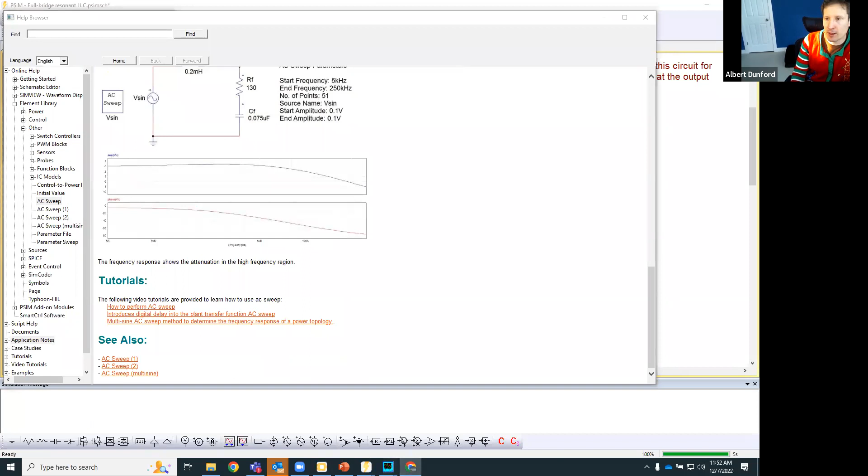We should comment on what's happening on the other side here: eventually the PowerSim website will merge into Altair One. So this is the support portal for all Altair products, and everything will migrate over here. Our YouTube channel, PSIM YouTube, used to be the PowerSim YouTube channel, but now it's a full Altair how-to channel.

You see all the PSIM videos are here, but they're adding in a whole host of other videos for other Altair products. So this is now going to be the main resource for where all the videos will live, and not just PSIM videos. So those are some things to look for that are coming soon.

I will also comment that previously people used to send emails to support@PowerSim for support. That is going to be changing soon, and you'll be putting tickets through the Altair One portal. So you'll need to make an Altair One account at some point so that you can submit those tickets, because in the old days with PowerSim, we just answered the emails. In the new system, we need to actually track the emails and the close time and all that stuff a little more closely.

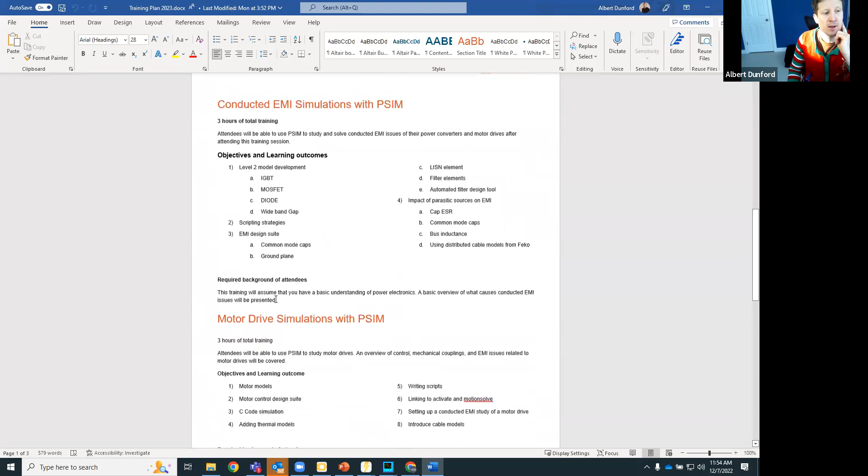So the training plan is going to be 4 training sessions. Get started with PSIM training, 3 hours. You'll be learning all about this sort of thing. Conducted EMI simulations with PSIM, motor drive simulations, and then power supply design with PSIM are going to be the training material hosted next year. I will be hosting these sessions, and you will access those through the Altair One.

There will be a sign up. There'll be more of a formal course. I'll provide you with labs to work with as we go through it. And it'll be a multi-day thing. So the 3-hour sessions will be an hour and a half over 2 days. So look for that to come next year. And to get to that, you'll have to sign up through the Altair One portal there.

So these are all the sorts of things that are coming next year, as we move to drive forward with more integration with what the Altair tool universe has. Eric, I think, or Drew, out of things to talk about here. Or, I mean, I could talk more, but I might need more time. No, I appreciate it, Albert. I think you saw the questions in the chat, right? I think you already covered. Yeah, there was the one question about, oh, here, there were some more that popped up.

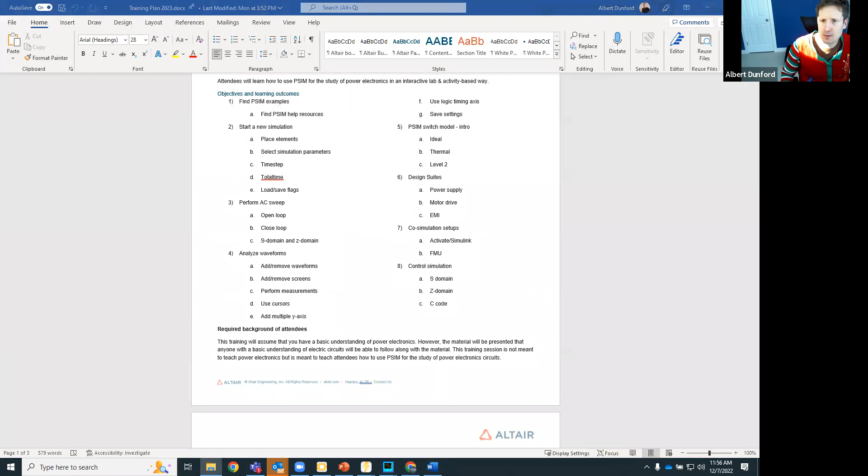I was hiding. For the cable capacitance simulations, how do you obtain these inter-cable capacitance values? So this is what FEKO generates. FEKO generates it off of your cable geometry. Let me just pull it up. So where is it here? So this is the file that FEKO generates. Kind of move past a lot of the stuff at the top and get to the meat here. So this is the definition of each cable.

So in my situation, it was 3, and let me just launch the solver here too. So just launching FEKO. So this is what gets exported. So we see the inductance values and the capacitance values, and this is for segment 1. And it tells me how many segments I have. It's 15 to model this cable properly. And it gives me the inductance, the capacitance, and then it gives me the surface impedance, the transfer impedance, and the admittance. And all this data, I then took and I put it into PSIM.

I built the equivalent circuit. So the way this is working right now is it's kind of manual, where I rebuilt the circuit. Where we're going is to do this off of S parameters. So instead of having these distributed models, you'll be able to put an S parameter circuit in that'll drive it that way. But these capacitance values are calculated based on the proximity of that conductor to its neighbors, to the shield, to ground. So it's a full meshing calculation that does it. So yeah, this is the beginnings of it.

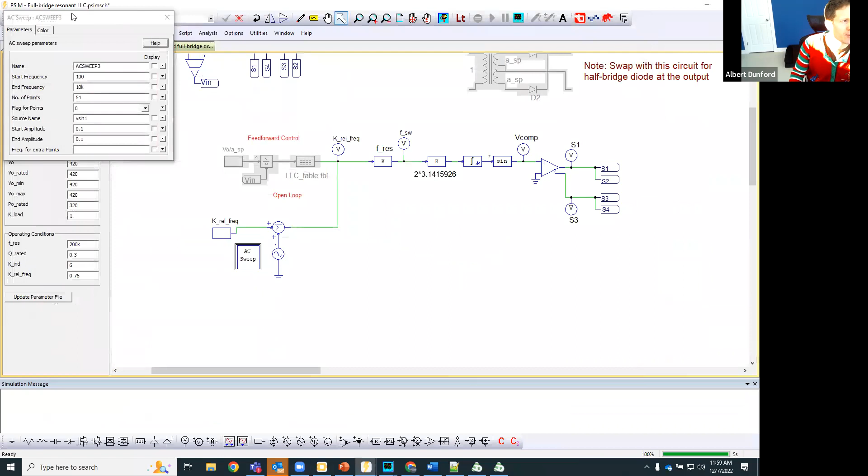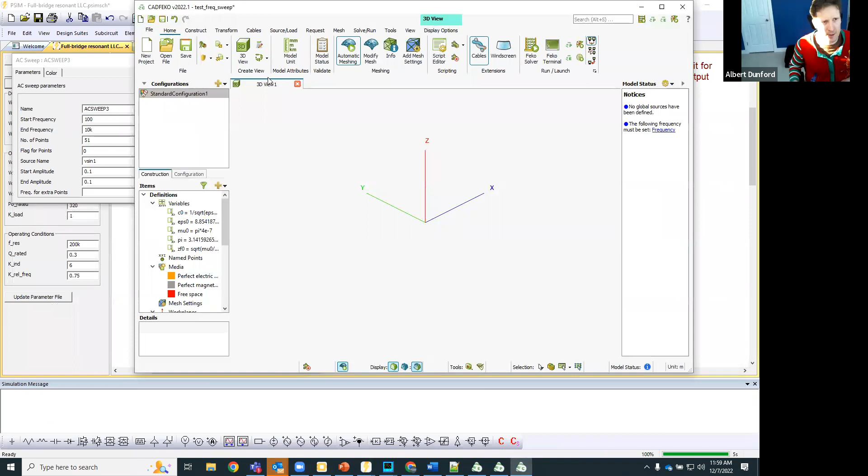While that's loading, there's a ton of scripting examples. I didn't answer that directly. File, open examples in here, and script is right there. So look through all these examples, and there's a bunch of scripting things in there. Okay, here's CADFEKO. We just want the display options. Oh, geez. I'm not a cable guy. That's why I didn't open up FEKO to begin with. Anyways, that's it. We've hit time.